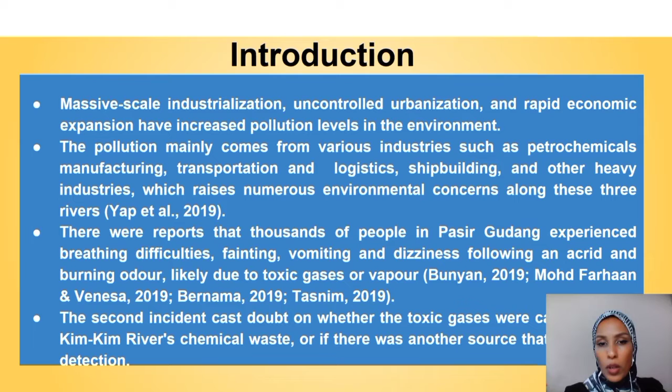People there started to doubt whether the toxic gases came from the Kim-Kim River's chemical waste or from another source that needs to be detected. After the Kim-Kim River illegal dumping, it's necessary to call on the government to find the responsible persons and to take strict measures to prevent any other tragedy from occurring.

Ultimately, when it comes to waste management, one of the biggest problems is how to deal with scheduled waste. The logical method is collecting, transporting, treating, and disposing. In general, water quality refers to water's physical, chemical, or biological characteristics. The Department of Environment Malaysia has set national water quality standards for Malaysia based on the Water Quality Index score.

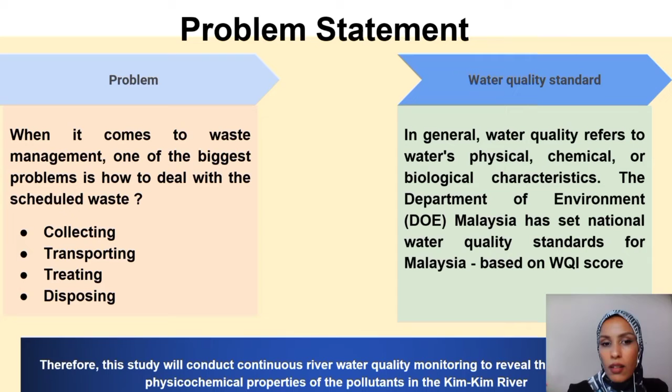Therefore, the present study will conduct continuous river water quality monitoring to reveal the physical-chemical properties of the pollutants in the Kim-Kim River. In order to get an appropriate monitoring report and to know more about the parameters of the Kim-Kim River that give us the real state of the water quality index, we have designed 3 objectives.

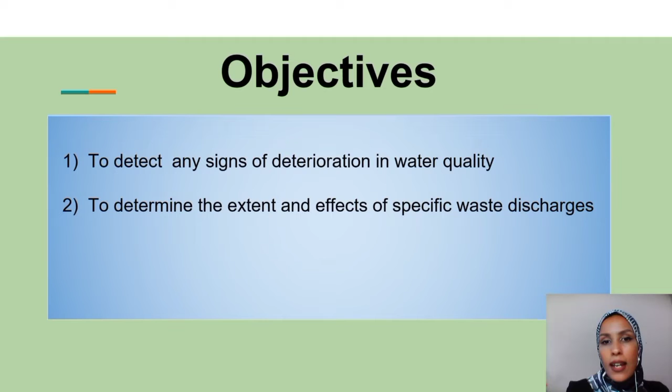One of them is to detect any signs of deterioration in water quality. The second one is to determine the extent and effects of specific waste discharges. And the third one is to fulfill the requirements for the Department of Environment to publish an annual report on the environmental quality of the river.

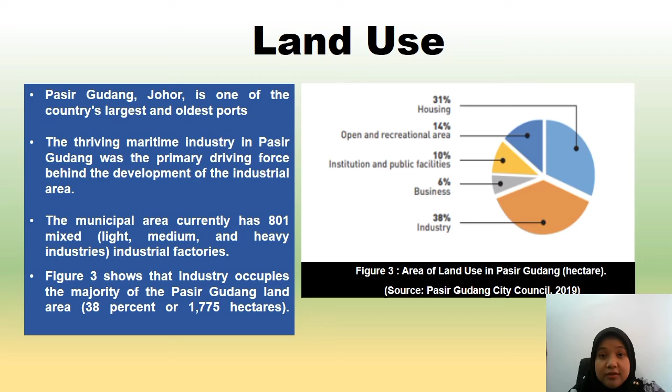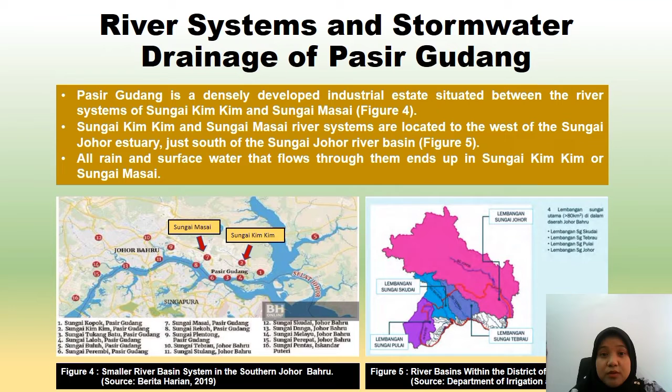Pasir Gudang is situated between the river systems of Sungai Kim Kim and Sungai Masai, as shown in figure 4. The Sungai Kim Kim and Sungai Masai river systems are located at the south of the Sungai Johor River Basin, shown in figure 5, where all rain and surface water flows end up in both rivers.

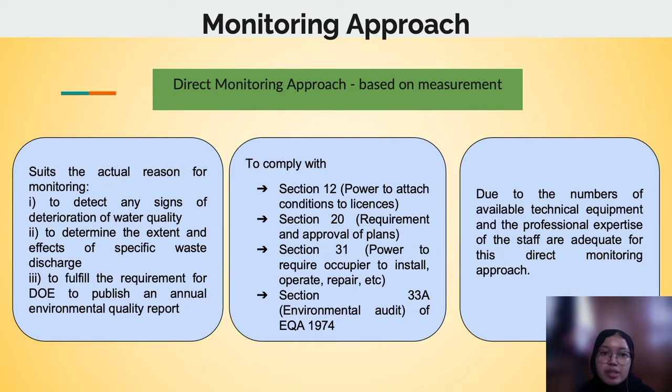And the third one is because the number of available technical equipment and the professional expertise of the staff are adequate for this direct monitoring approach. So because of these three reasons, the direct monitoring approach is chosen for this study.

The monitoring method decided is operational monitoring, which involves the measurement of the physical and chemical parameters of the pollutants in Kim Kim River. This includes a sampling frequency of 4 to 12 times per year per station, during both the rainy and dry seasons of 2022.

The in situ parameters involved include DO, turbidity, conductivity, salinity, pH, and temperature, while the ex situ parameters that will be analyzed in the laboratory will be BOD, COD, TSS, ammoniacal nitrogen, chlorine, phosphate, oil and grease, biological data, and other trace metals such as arsenic, cadmium, chromium, and others. For the accuracy of the measurements in our report, we make sure to follow the QA and QC requirements.

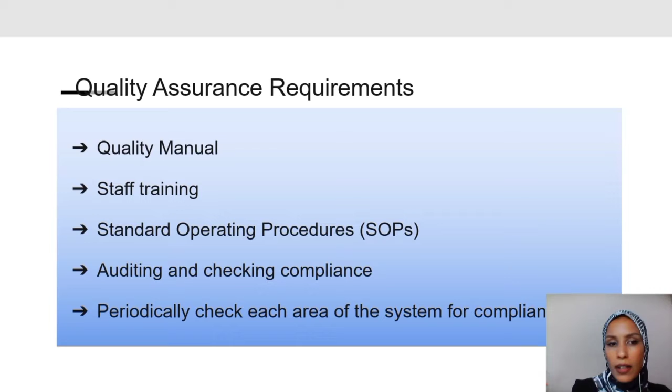First of all, for QA requirements, the quality manual, and to make sure also that staff is well trained. We follow the standard operating procedures and auditing and checking compliance, and also periodically check each area of the system for compliance. Moreover, for the quality control requirements, we have field blanks, field duplicates, external field duplicates, calibration blanks,

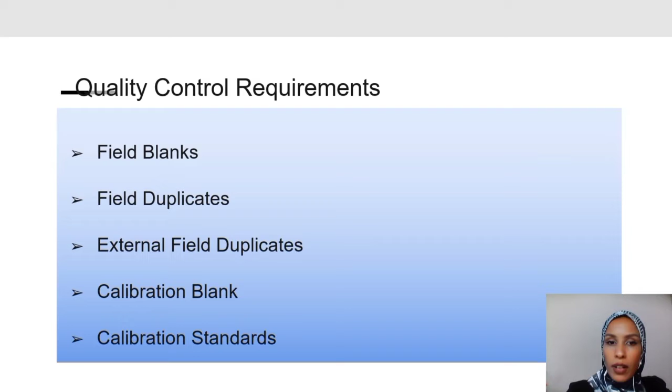and calibration standards. After finishing all the monitoring procedures, for record keeping and reporting, all the sampling, analysis, measurements, examination, calibration, and maintenance that will be carried out in accordance with the environmental monitoring program will be recorded. And the records of the manufacturing processes, of the maintenance and performance monitoring of the pollution control system will be

maintained as per Regulation 10 of the Environmental Quality Act 1974, and also the records will be kept for at least 3 years and shall be made available for inspection by the Director General or any officer authorized in writing. And also the results of the mandatory environmental monitoring will be presented in summarized form to the public authorities as required in section 31 and section 34A of the Act.

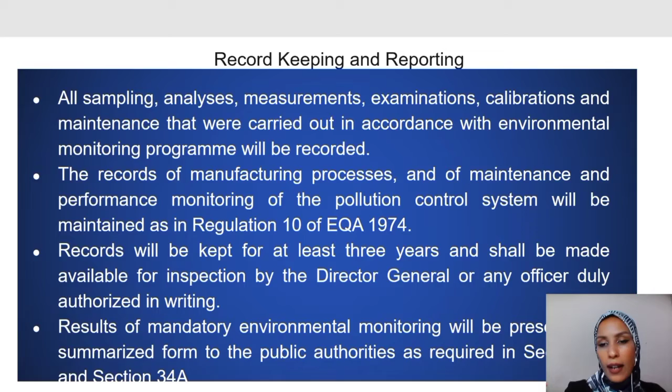I will continue with arrangements for the assessment and reporting of exceptional and accidental release. This is based on the Control of Industrial Major Accident Hazards Regulations 1996. Every manufacturer shall submit a notification of industrial activity form for existing installations. For new installations, they must submit notification not less than a month before construction. And the Director General may determine if an installation is a major hazard installation or not.

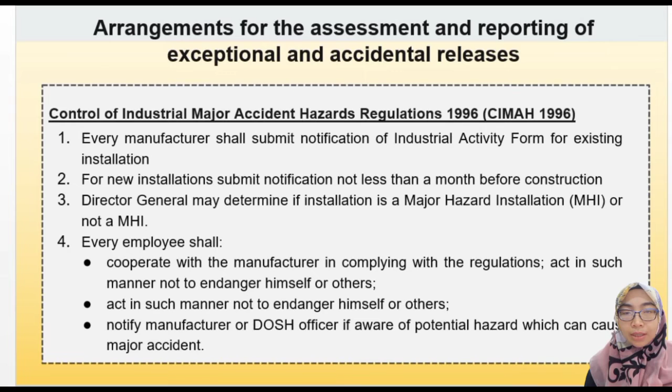And then every employee shall cooperate with the manufacturer in complying with the regulations, act in such manner not to endanger himself or others, and notify the manufacturer or DOSH officer if aware of a potential hazard which can cause a major accident. And the threshold quantity is specified in Schedule 2 of the regulations.

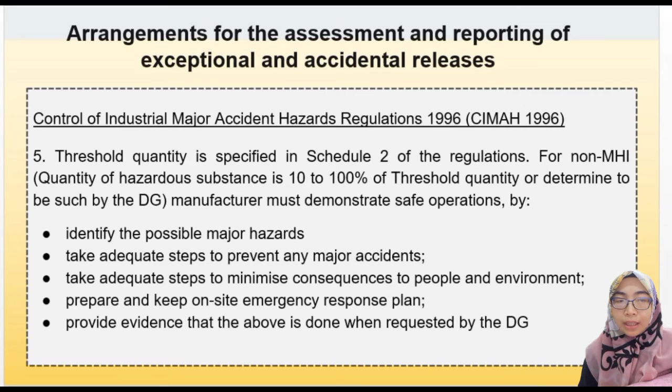For non-major hazard installations, the manufacturer must demonstrate safe operations by identifying the possible major hazards, take adequate steps to prevent any major accident, take adequate steps to minimize consequences to people and environment, prepare and keep an on-site emergency response plan, and provide evidence that the above is done when requested by the Director General.

Okay, and then for major hazard installations, when the quantity of hazardous substance exceeds the threshold or is determined to be so by the Director General, they must prepare and submit an industrial activity report by a competent person at least 3 months before commencing the activity, and not make any modification that is not consistent with the industrial activity report until he consults a competent person and resubmits a further report, and the report is to be updated every 3 years.

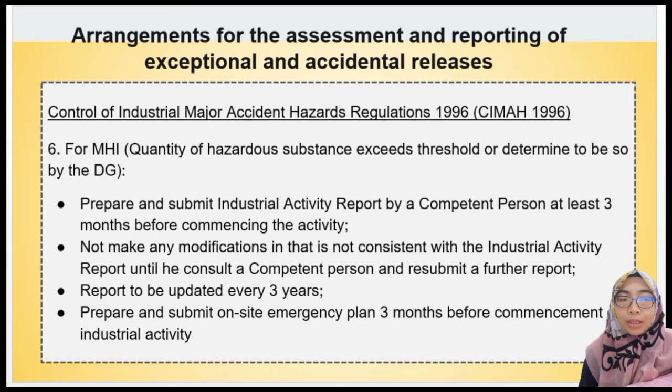And they must prepare and submit an on-site emergency plan 3 months before commencement of industrial activity. The emergency plan needs to be prepared in consultation with a competent person, and also needs to be updated once every 3 years.

They must prepare information on the industrial activity and inform local authorities or port authority for them to prepare an off-site emergency response plan. And they must provide information as to the hazard of the industrial activities to persons or the public who may be affected by a major accident around the site. The information is to be supplied within 6 months of determination that the site is a major hazard installation, and is to be updated and resupplied at regular intervals.

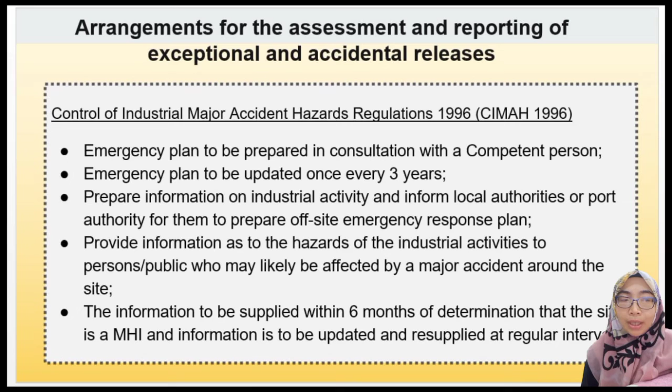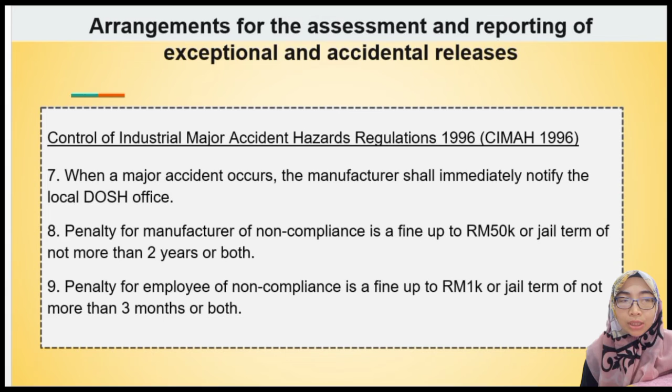When a major accident occurs, the manufacturer shall immediately notify the local DOSH office. The penalty for a manufacturer for non-compliance is a fine up to 50,000 ringgit Malaysia or a jail term of not more than 2 years or both. The penalty for an employee for non-compliance is a fine up to 1,000 ringgit Malaysia or a jail term of not more than 3 months or both.

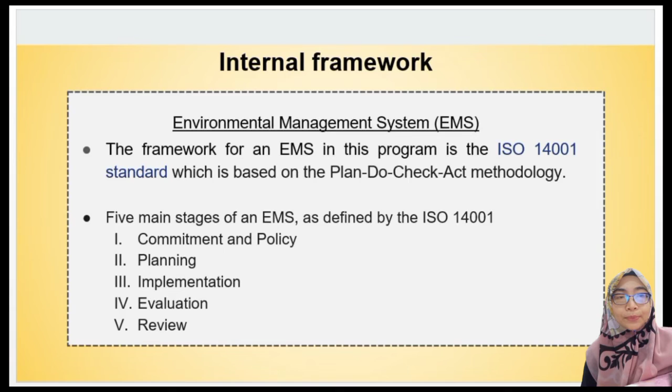For the internal framework, we will be using an environmental management system. This framework for the environmental management system in this program is based on the ISO 14001 standard, which is based on the plan, do, check, act methodology. There are 5 main stages of the EMS as defined by ISO 14001: commitment and policy, planning, implementation, evaluation, and review. For compliance control procedures, there are 4: environmental auditing, environmental risk assessments, ISO 14000 audits, and other independent or third-party audits.